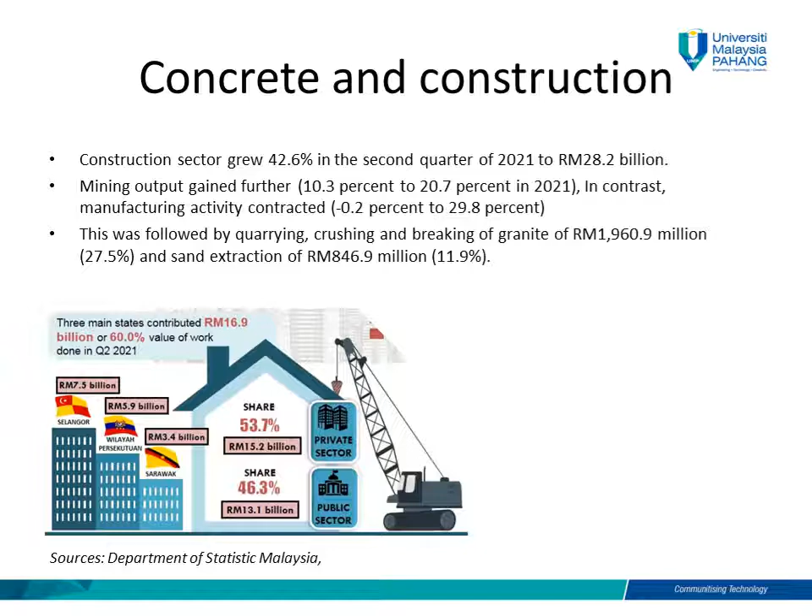My problem statement is the cracking in concrete. Concrete is a material that is very simple to work with. However, if it is not adequately worked on, it might cause major issues. Cracking, curling, scaling, and a variety of other issues are examples of concrete issues. Let's go to the crack.

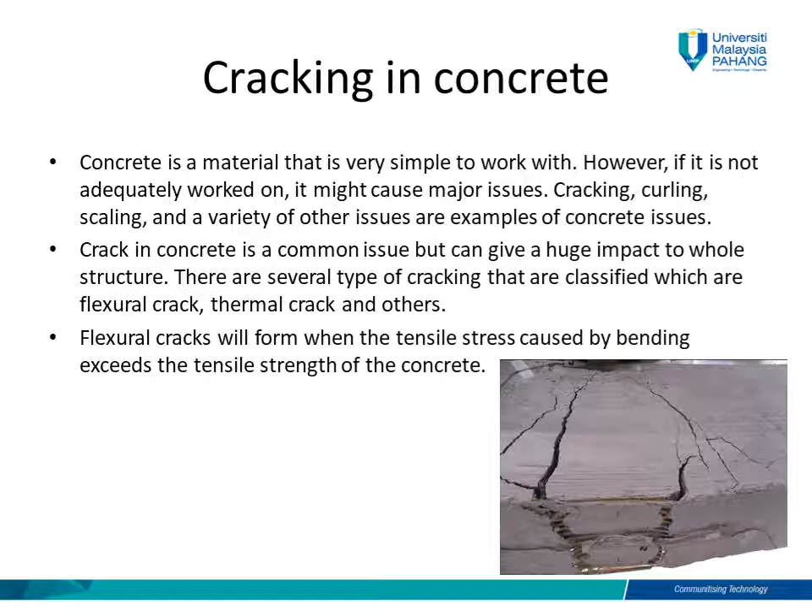Crack in concrete is a common issue that can give a huge impact to the whole structure or building. There are several types of crack that are classified, which are flexural crack, thermal crack, and others. The flexural crack will form when the tensile stress caused by the bending exceeds the tensile strength of the concrete.

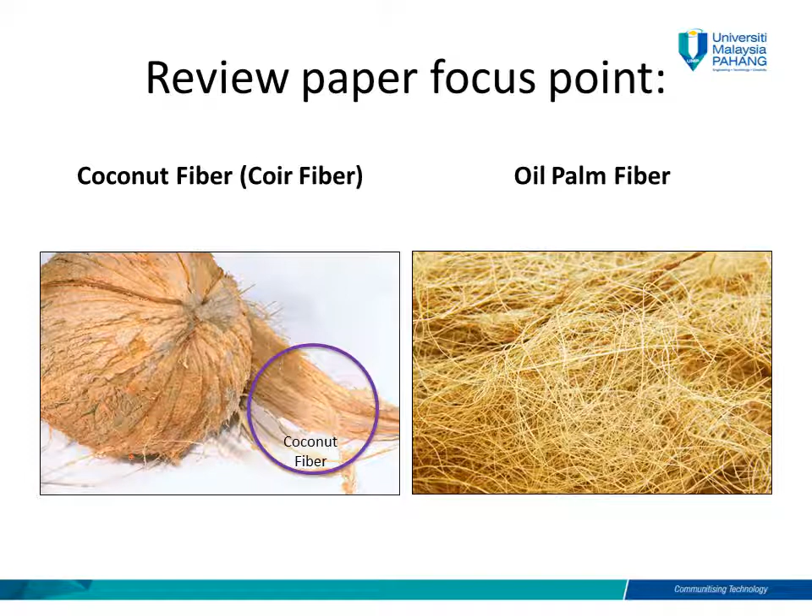My review paper focus point is on the coconut fiber or coir fiber, and the second one is the oil palm fiber. First is the coir fiber. More than 60 million metric tons of coconut were produced in 2019 worldwide. Malaysia has created more than 12% or 600 kilotons of coconut waste per year. The waste will have a negative impact on the environment during its disposal process.

The demand for coconut milk and water has highly risen due to the rising health consciousness. The coconut fiber is a natural fiber derived from the outer husk of a coconut, and it is a component of the coconut fruit.

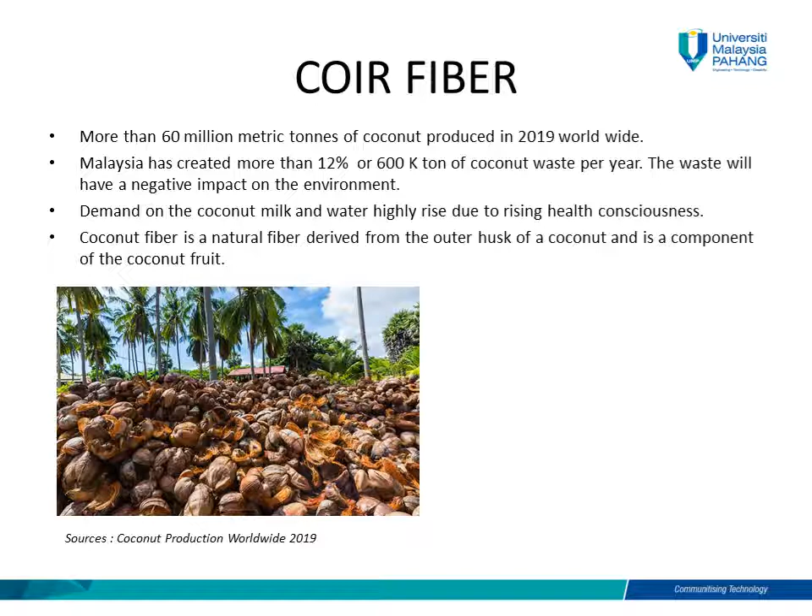Okay, next is the oil palm fiber. Malaysia is one of the largest producers and exporters of oil palm. The statistics show the increase in change of oil palm production from 5.97% to 11.49% from 2020 to 2021.

The increase of the production brought an increase in oil palm waste, and in Malaysia there are more than 400 palm oil mills, and each produces a huge amount of waste, which is currently not fully utilized and polluting the environment. The oil palm fiber is made from the empty fruit bunch that is discarded after the oil palm fruit is extracted.

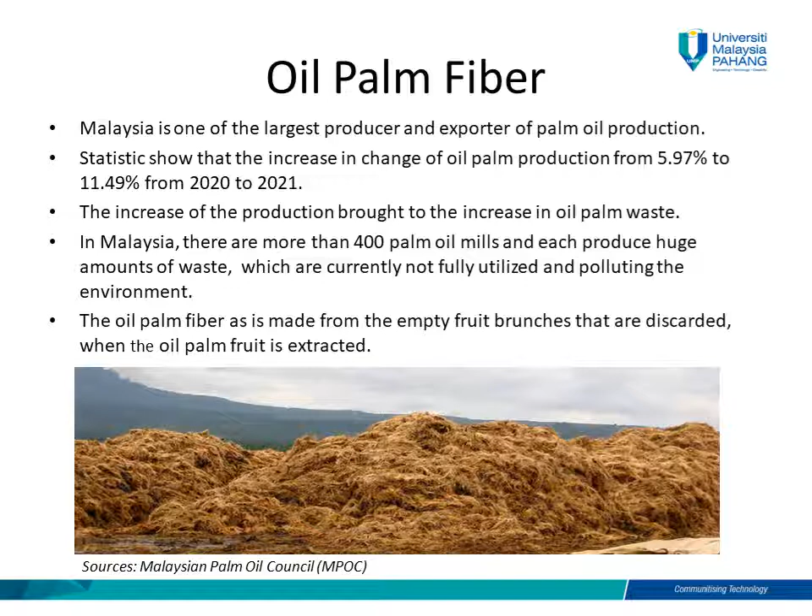For my objective, the hypotheses that have been proposed are: how is the strength potential of natural fiber as a replacement in concrete? Second, is the stress on concrete increased with the fiber replacement? And the third one is the fiber length is correlated with the quantity of replacement in concrete.

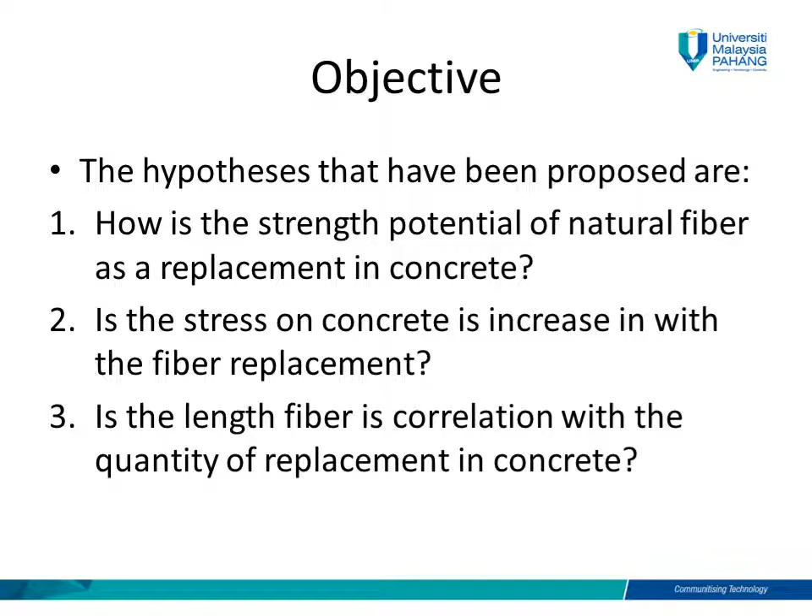Now we will discuss the mechanical properties of coir fiber as an additional material in concrete. Okay, this table shows the compressive strength of coir fiber from other researchers. First one is Achudan. He has 3 replacements, which is 1 to 3%, and his data show increased strength higher than the control one. Second is P. Srinidhi. She has 3 data also and shows an increased strength higher than the control one.

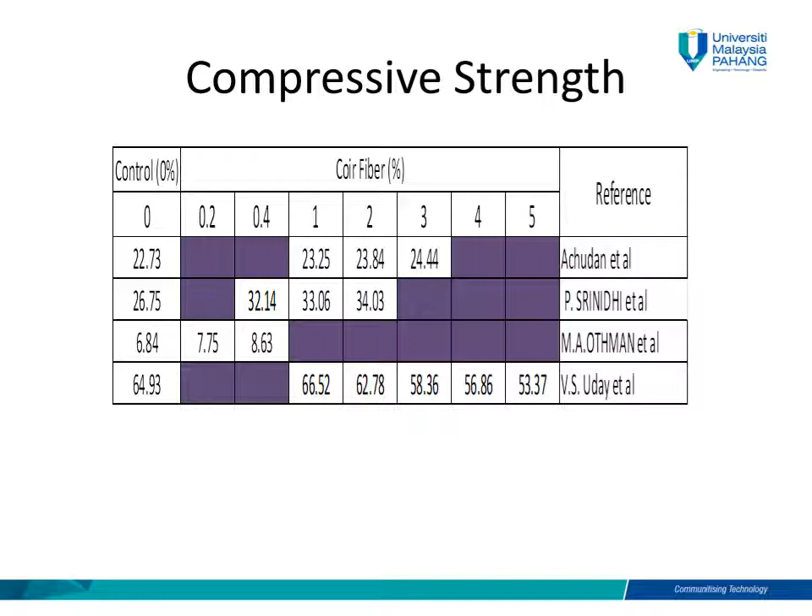And the third one is M.A. Othman. He only has two data, which is 0.2 and 0.4, but had increased data, which is 7.75 to 8.63, higher than the control one, 6.84. And the last one is V.S. Uday, who has 5 data, but the trend shows a decreasing trend from 66.52 to 53.37, below the control one, 64.93. And next is flexural strength of the coir fiber.

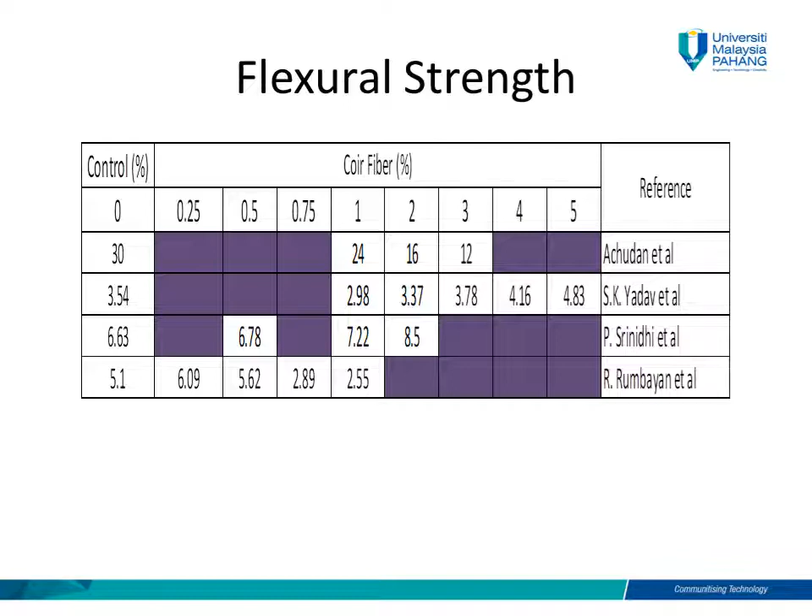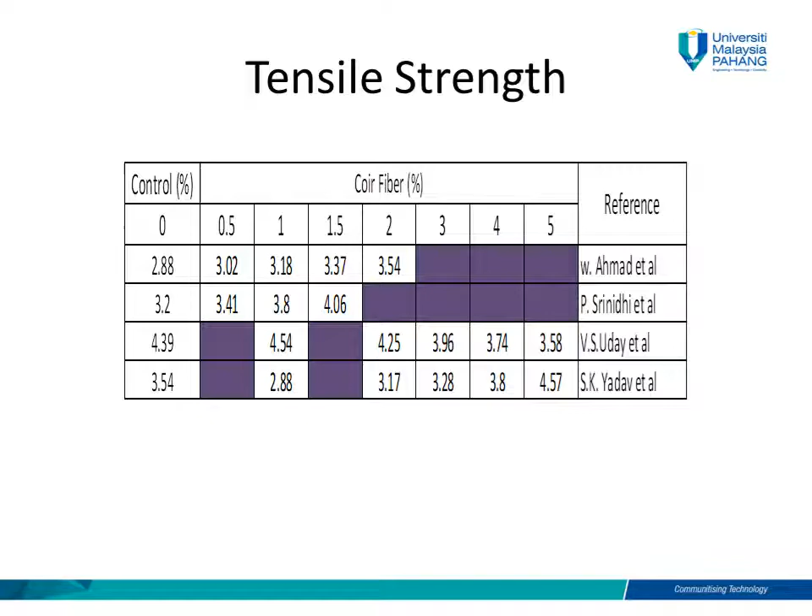Okay, now is the hypothesis of the coir fiber part. First, the compressive strength shows that the more addition of coir fiber in concrete, the higher the strength of concrete, but at the limitation of 1 to 3% only. Second, the stress of concrete increases along with the purpose of fiber as a reinforcement in concrete. Next, the tensile strength increases when the fiber length and the percentage increase. The fourth one is the length of fiber gives a high effect to the strength of the concrete, either increase or decrease.

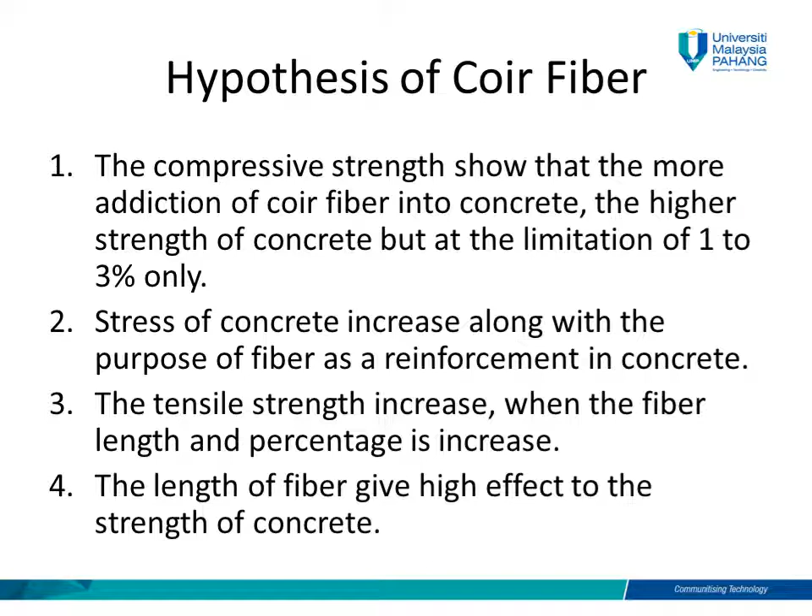Next is the mechanical properties of oil palm fiber as an addition in concrete. Okay, now is the compressive strength of the oil palm fiber by the previous researchers. The first one is Mr. N. Gangadharan. He has 3 replacements, and his replacements show an increasing trend, from 29.48 to 31.11, higher than the control one. Second is S.W. Lee, who has 3 replacements, and his replacements also show an increasing trend from 49.5 to 55.1, higher than the control one, 47.3.

The third one is L. Pusit. L. Pusit's data is in the hundreds because she used the mortar size. Her data show a decreasing strength from 376.6 to 288.5, and it is lower than the control one. The last one is V. Gunalaan. He has 4 different replacements, which are 5%, 10%, 15% and 20%, and his data show a decreased trend, but higher than the control one.

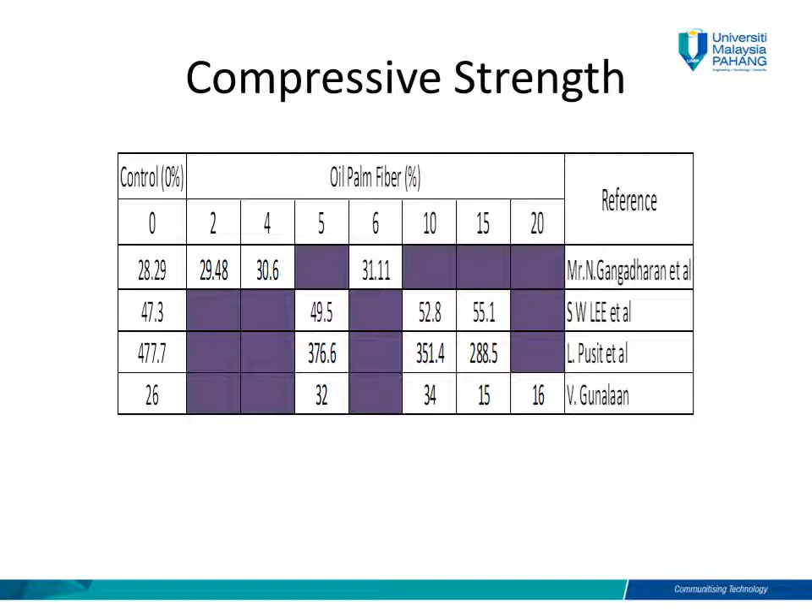Okay, next is the flexural strength of the oil palm fiber. For the first researcher, Mr. N. Gangadharan has 3 replacements, and his replacements show an increasing trend from 19 to 22, higher than the control one. The second is L. Pusit, who has 3 replacements, which are 5, 10, and 15, but the replacements show a decreasing trend from 85.2 to 77.4. And the last one is V Gunalaan. V Gunalaan has a decreased trend from 2.3 to 1.4, below the control one.

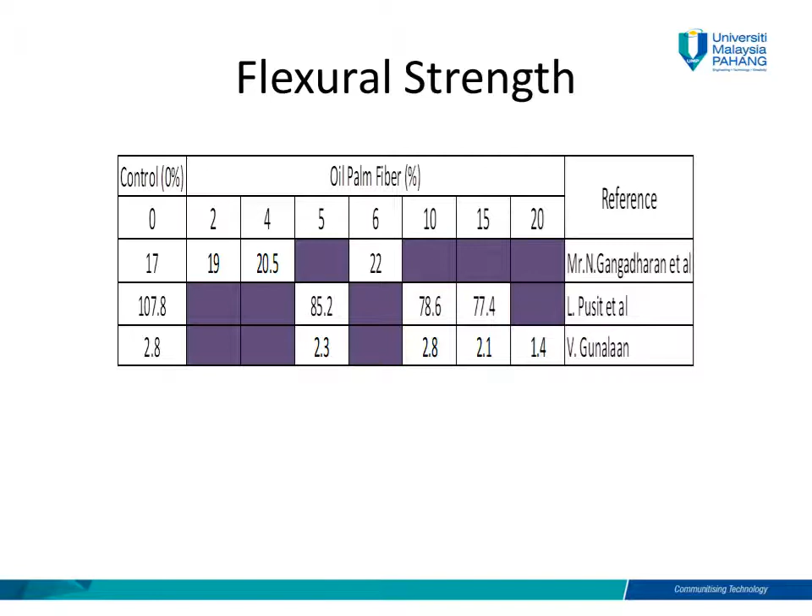Next is the tensile strength of the oil palm fiber. For this fiber, data is available for 2 researchers only, because most other researchers lack this data. Okay, let's go for the first one, N. Gangadharan, who has shown that the trend of his data is increasing from 7.002 to 7.49, higher than the control one, 6.57. And the second one is Momoh. Momoh has 6 data, which are 0.5, 1, 1.5, 2, 3, and 4, and her data show a decreased trend from 3.45 to 2.94, and it is lower than the control one, 3.33.

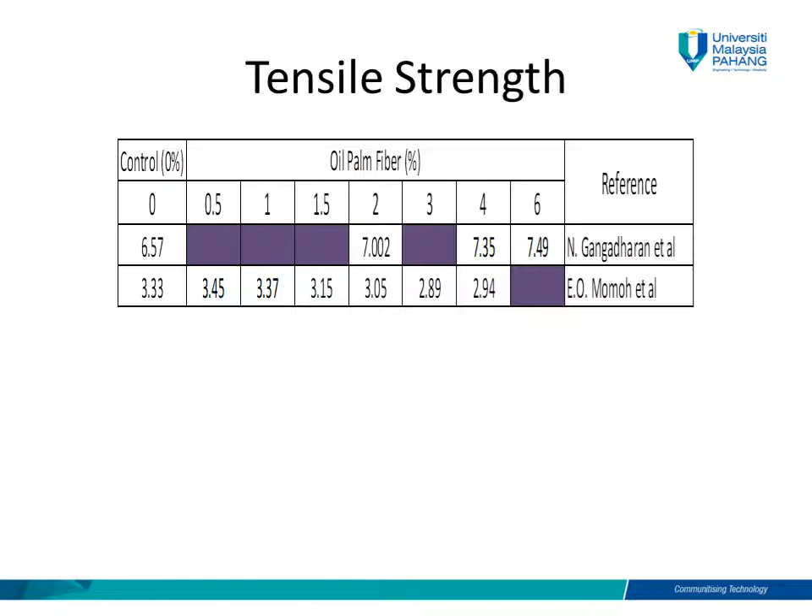Now is the hypothesis of the oil palm fiber. The compressive data of previous research show an increase in strength along with the replacement, but it declines when the length of the fiber is longer than 5 cm. Second, in flexural data, supposed the strength is increased with the increasing of length, and the decline happens due to the moisture content in concrete or during the casting process. The third one is in tensile: the strength is increased, affected by the length of the fiber that is below 5 cm.

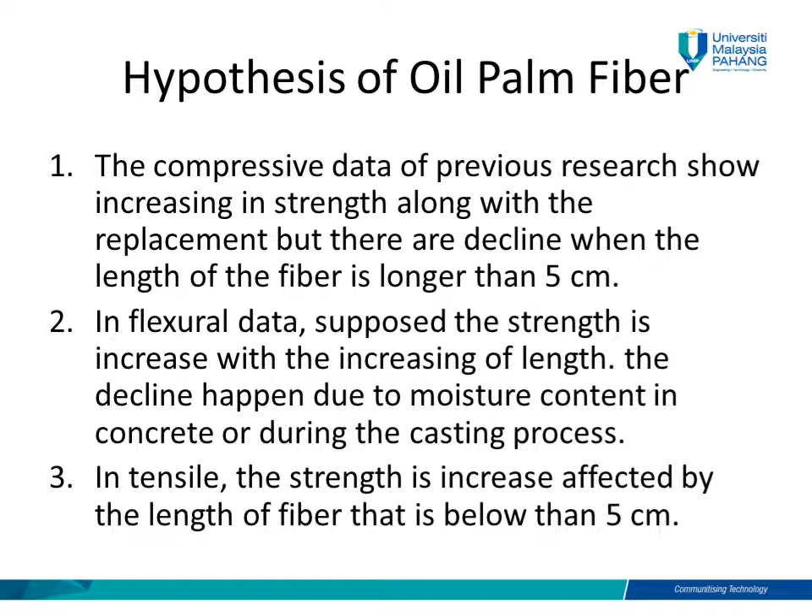Okay, for the conclusion, the addition of the fiber in the concrete increases the strength of concrete. The second one is the stress of concrete increases due to the properties in nature of the natural fiber. And the last one is the correlation of concrete strength with the fiber length shows that the range of fiber below 5 cm can increase the strength of the concrete.

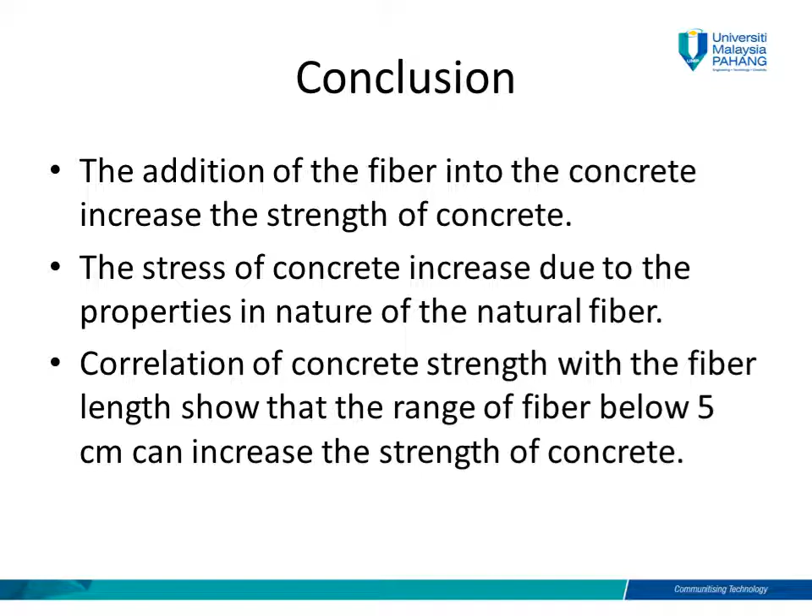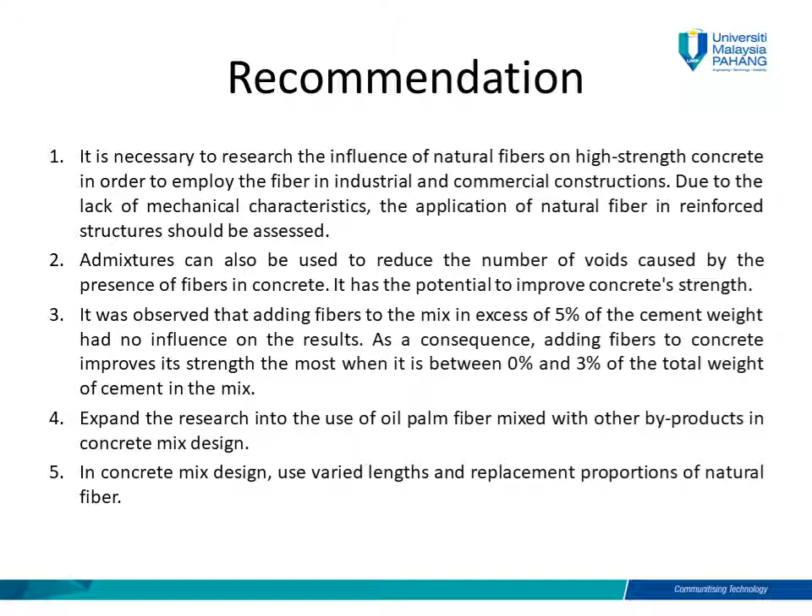The third one is, it was observed that adding the fiber to the mix in excess of 5% of the cement weight had no influence on the result. As a consequence, adding fiber to the concrete improved its strength the most when it was between 0 to 3% of the total weight of cement in the mix. The fourth one is, expand the research into the use of oil palm fiber mixed with other byproducts in the concrete mix design. And the last one is, in concrete mix design, use a variety of lengths and replacement proportions of natural fiber.